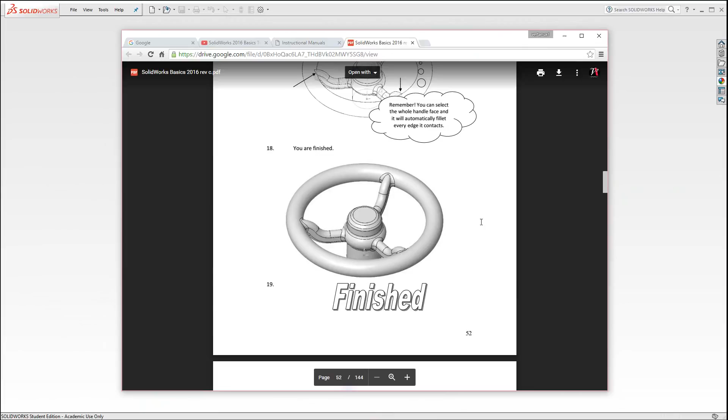This is our goal today, to create this hand wheel that you see. We're going to step through how to create that. Some of the things we're going to learn are some new sketching techniques, as well as sweeps and circular patterns.

Start with a new part file. Make sure you're in IPS for inch pound second, just down below here. Just make sure that's set to that. Let's go to the front plane and start a sketch.

The first thing we want to construct is actually this block, which is 3 inches by 1 inch. So we could take the corner rectangle tool, glide up to the origin when it snaps orange, click, drag it out, click again, and go ahead and add smart dimensions. 3 inches on this side, and on the base, set it to 1 inch.

Go to the centerline tool and just draw a vertical center line above that.

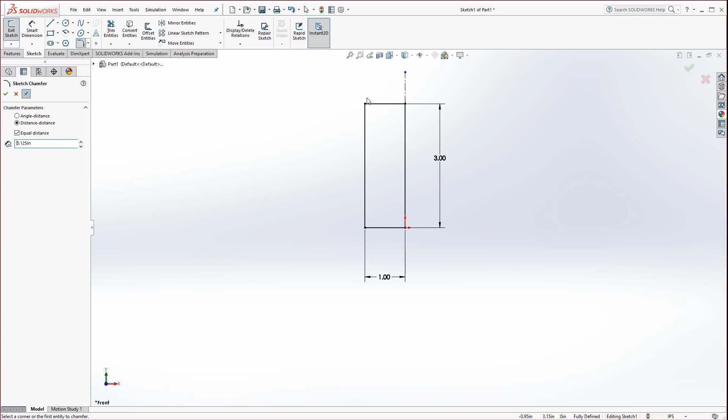Now, what we're going to take a look at next is the sketch chamfer tool. If you click on sketch chamfer, in this case, we'll keep it at distance to distance and set it to 0.125. Just click on this upper left corner, and you'll see, I'm going to hit the green check mark, and you'll see these dimensions up here.

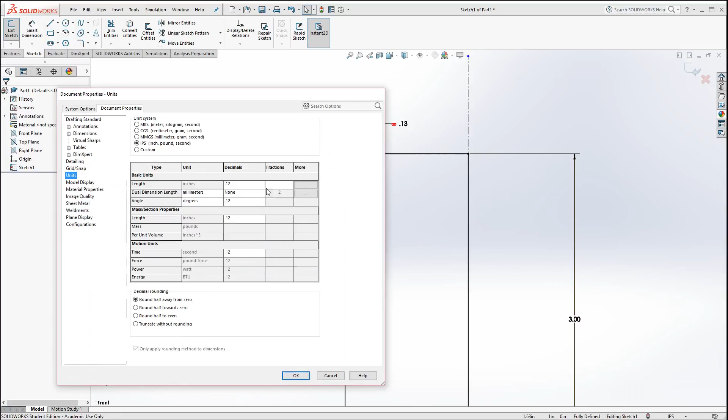Now you'll see a little red chain link, and that means the two are linked. If you change one, the other one updates. Notice it's 0.13 because it rounded it. So if you go to IPS, edit document units, you can set the length in units here to 0.123 to heighten the precision.

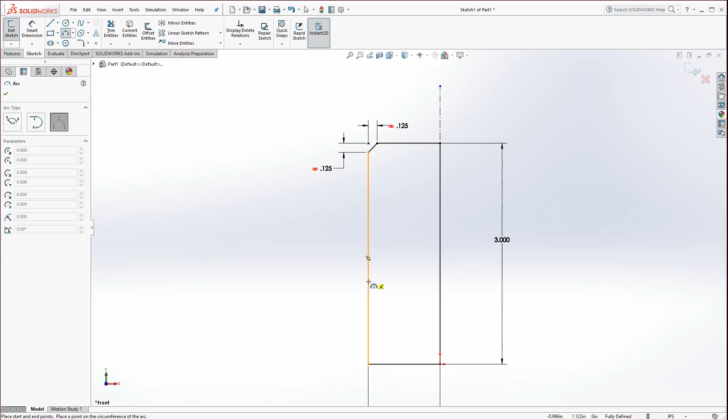The next thing we need to do is add a radius onto here. So we're going to click on the little arrow to the right of the radius options and go with 3-point arc. Move your pointer up to the edge on the left side of your rectangle and get below the midpoint, about approximately where my pointer is currently. Click one time and release it.

Move your pointer up again past the midpoint, so maybe around 1 inch for the length. Click, and then move your pointer outward. Now be very careful, keep the center point. If you look there, there's a little blue center point right underneath the radius 0.623. Keep that to the right of the line. You don't want to hyper expand this, or else it doesn't collapse back in, so keep it below that. Maybe make the radius around 0.6-ish.

Click, and now let's go to Smart Dimension and add a dimension to that. And the dimension for that is 1/2 inch.

Now we need to also add some dimensions to locate the center of it. In this case, it's going to be 1.75 off the base, and the center point is actually positioned 0.25. Well, in this case, actually, we have a 2.5 diameter.

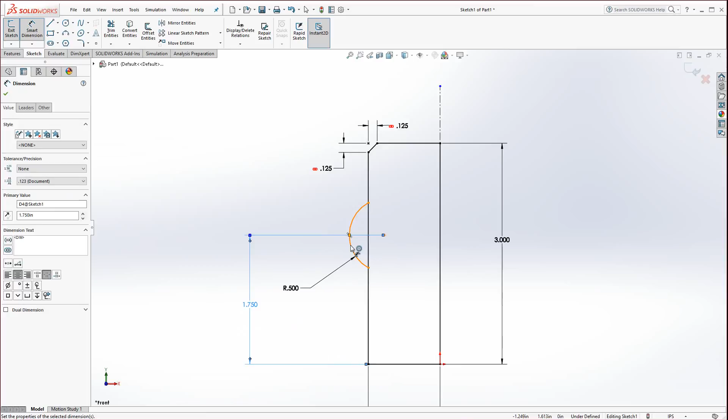So let's first position it off the base. Click on the arc, click on the bottom line, drag this out 1.75, and now go ahead and click on the arc, and then click on the center line that's peeking out.

If you don't click on the center line, and if you click on the object line below it, you won't get this next option. Click, drag it to the right, and you'll see it will give you the diameter dimension, which we saw in exercise 2. Go ahead and click on that and just hit the green check mark, because what it's doing, notice it's dimensioning to the center. So whatever the dimension is, it's not what we want.

So instead, go to leaders, and you'll see arc condition, first arc condition, and we want maximum. And it takes it all the way around if we were to look at the maximum extent of that arc on both sides. Now there's another way.

Usually you could click on these points and drag them out. That sometimes works, but this way is the best way I found. If you don't get the arc condition or first arc condition options here on the leaders tab, you probably dimensioned to the center point of the arc versus the actual arc itself. Just delete the dimension if that occurs. Retry dimensioning from the arc to the center line.

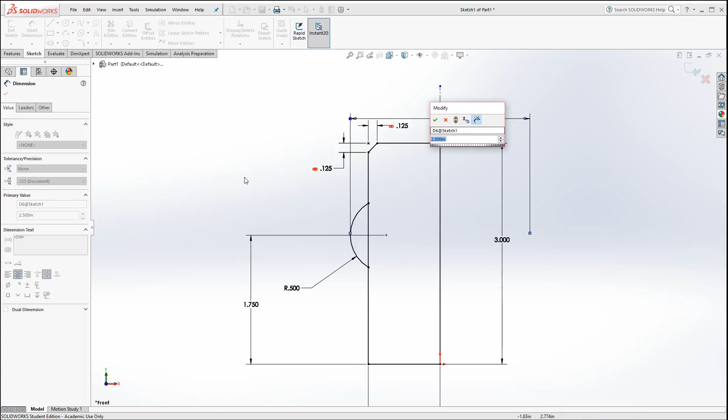Okay, now I could actually just double click on the dimension and type in 2.5. Also, if you want, you can double click a couple times on it, then hit the green check while this is still active. You'll see there's some dimension options, including a small library like the diameter symbol, which puts a diameter symbol in for us. That's helpful, not essential, but it's helpful for making the drawing later on. We don't have to put it in later.

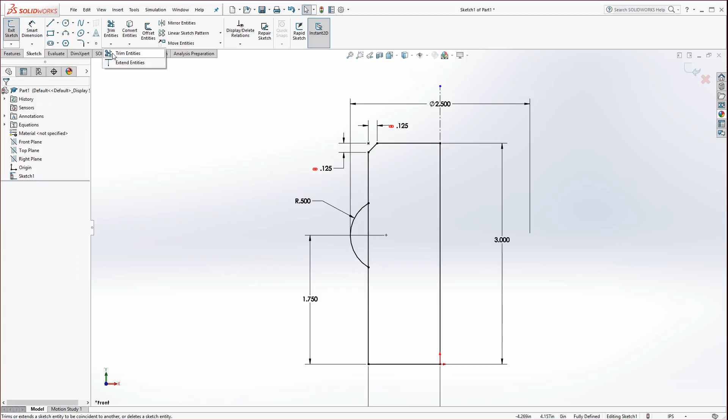Okay, let's reposition these. Now we just need to trim this out, so make sure you go to Trim Entities. Click on it. Notice if you hit the little arrow, there's trim and extend - believe it or not, Trim Entities does both. In this case we're going to use Trim to Closest. Just get your pointer on that line in between the arc, click, and it will remove it. Hit the green check mark.

Now you're free to revolve this. Let's go to Features, Revolve Boss Base, and it should pick up on the center line without us having to select it - as long as there's one center line, it just grabs it automatically. Let it go 360 degrees around.

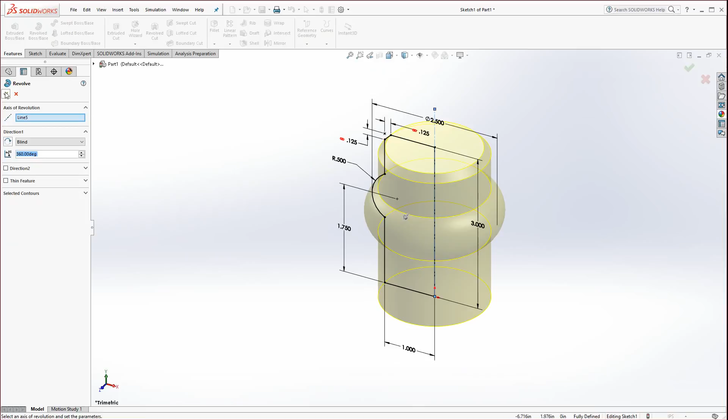Okay, now we could go ahead and select the front plane again and start a sketch, because what we're going to do next - hit your space bar, go to front, and zoom out with your scroll a little bit. If you want, you could also hold Control and your middle mouse button to pan to the right. We're going to construct one of the spokes.

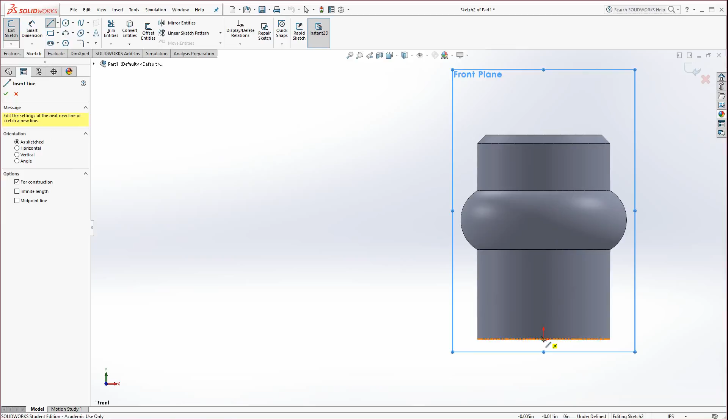So we're going to make, you might say, the skeleton of the spoke using curves. We'll go to the line and align yourself - actually, go to center line first, and click on that origin at the base because it's the center of the model. Make sure you draw a vertical center line. Hit Escape. Now take the line tool and find somewhere on this edge, but not the midpoint necessarily.

Click and drag out a 2-inch line and then hit Escape. Go ahead and smart dimension that line, just drop it up here at 2 inches. Then go ahead and select the line and dimension it to the bottom edge of the hub, and dimension that at 1.75. That should center it for us on that radial area.

Okay, now let's go to the arc tools - in this case, find Tangent Arc. Click on this point, drag it to the left and up. It should be less than 90 degrees, so 70 or 80 degrees is good, and the radius of about a half inch is fine.

Click, and now you'll see you could drag off an additional tangent arc, and if you can, infer to it and actually get this center directly above - or below, I should say - the end of the arc. That's great. If not, don't worry about it. Click and then hit Escape.

Now go to the line tool and draw a line from this end, just extend it out. Now what we need is a tangent relationship between here, so as you look - I'm going to hold Control and select all these just to show you - you need to see tangency, tangency, tangency. That's what those little symbols indicate.

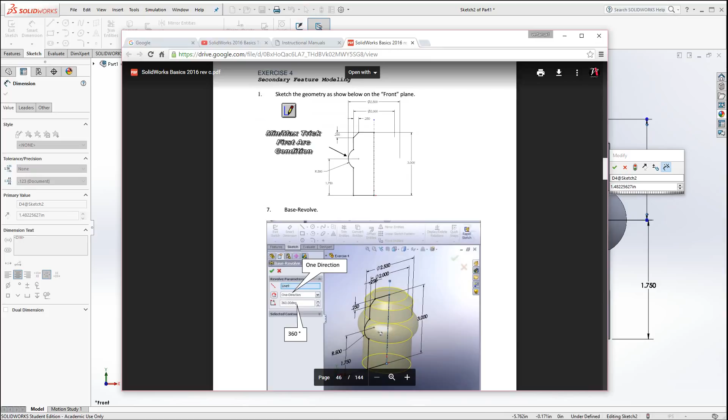Okay, now we could go ahead and add a few more dimensions here. Let's dimension from this line to this line. Drag this to the right, and that is going to be, let's take a look at the print, 1 inch. Okay, and finally, select this point to this line, just get it up here, and that's going to be 5 inches.

And now hit the rebuild button. The rebuild button regenerates the model. Any changes that might have occurred will update, and also it exits you out of the sketch. So you've got to be careful in some cases. You don't always want to rebuild while you're in a sketch if you're editing it. But if you do hit rebuild, notice it turns gray.

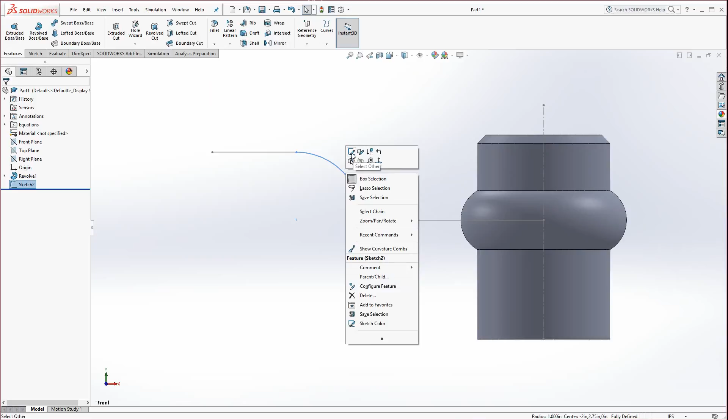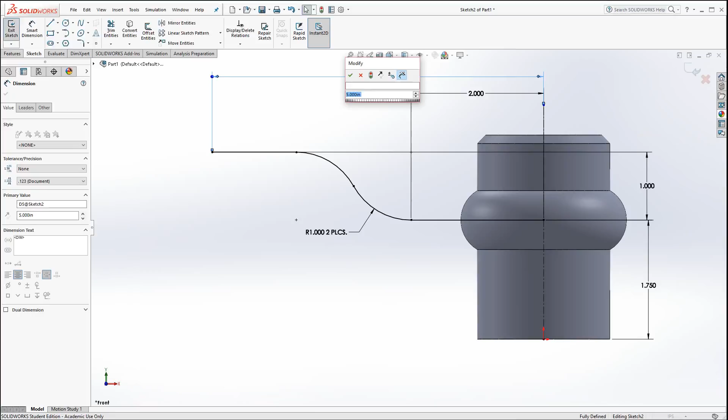You could always double click on it to bring it back, or you could right click on it and you'll find edit sketch. Different ways of getting back in, but I'm just going to double click on it because I think I actually put in the wrong dimension here. So let me go back to the drawing. I did. It was supposed to be 4 inches. So I'm going to double click on the dimension, type in 4, and hit enter. And now I could hit rebuild again.

All right. Now we're going to build the profile at the end here. We want to create a plane. There's several ways you could do this, but this is just one way. The trick is you select the endpoint where the plane is going to rest. Now hold Control down and click on the line that's attached to that endpoint. Click. And I'm holding Control. So you have to select the endpoint and the line it's attached to.

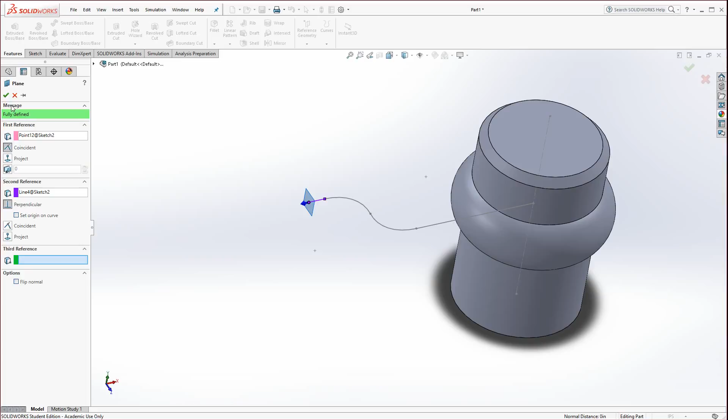When you go to Reference Geometry and Plane, you will see it will automatically create a plane perpendicular to that point, and that line, I should say. So that's one of many ways to create a plane. Go ahead and hit the green check mark. These are not really boundaries, it's just a visual aid, so you can enlarge that if you want, or make it smaller. Okay, now go ahead and select that edge of that plane and click on Sketch.

And hit your space bar, and here's where you could go normal to. All right, if it's rotated incorrectly, remember the Alt keys. You could rotate with Alt and the arrow keys; left or right will go clockwise or counterclockwise. Just make sure it's vertical as you see here. Now I'm going to take the center point arc tool. This is the toughest of the 3 arc tools that you have there.

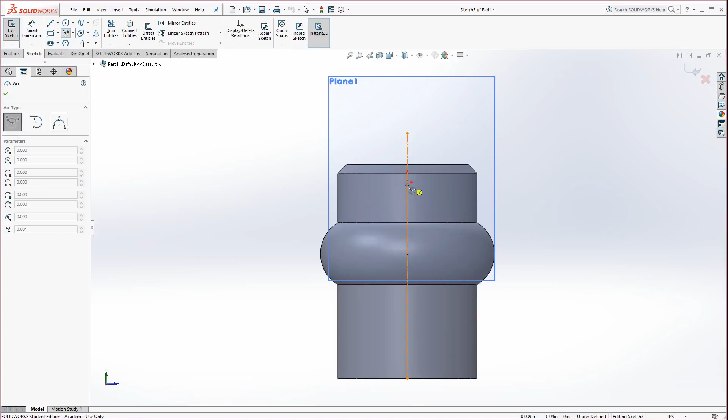Move your pointer right here, get on the origin, click, and drag out a radius about 1/2 inch. So not quite 1/2 inch actually. Keep it below 1/2 inch. And notice I'm horizontal. Click, drag up, and if you get an opening instead of an arc, a small little arc, go back down around and then go back up again. I'm just moving, I'm not clicking on anything. Now rotate it around till it snaps horizontal to the other side.

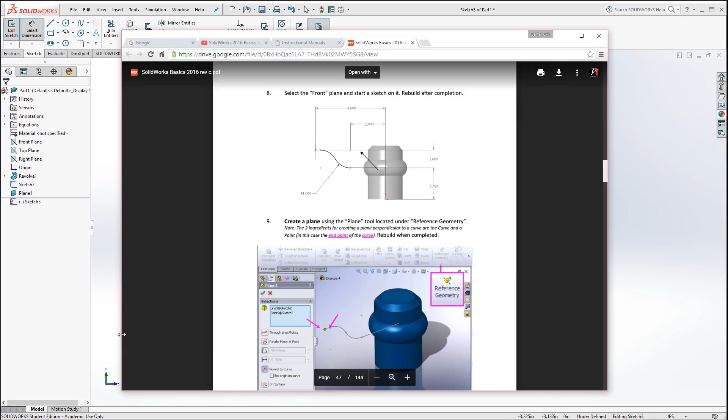Click, and now take the line tool, and off of this point drag down a short little line about 1/2 inch. Click, drag it across until it infers. Click, and connect it to close the line. Now let's go to Smart Dimension, and let's put the dimensions in according to the drawing. So in this case, 0.75, 0.5. So this, click down here and drop it below 0.5.

Now here's what you see occurring. Even though I drew that, it did not capture tangency automatically, and that happens sometimes. Sometimes you get lucky depending upon how you're drawing and what you're drawing. In this case, it was not successful. So I'm going to leave the dimension there. Don't panic about it. Just hit Escape on your keyboard if this happens to you.

Now hold Control and select the line and the arc that you want to make tangent. Release Control, and you could go ahead and click on Tangent. And now notice how it snaps back. Okay, the next dimension is 0.75 from top to bottom.

Click on the bottom line and click on the actual arc, not the center point of the arc. If you do that, you will limit yourself to this dimension right here. Just don't put it in dimension just yet. Just hit the green check mark. And what we can do now is you could grab that little blue square and drag it up.

Now in this case it's snapped, and this is what I mean by sometimes it's a little quirky. This is where you use the leaders tool and go to max. Yours might work. Sometimes I've seen where it works, other times it doesn't, depending upon what's behind it most likely. And in this case, now this needs to be 0.75. Okay, hit escape.

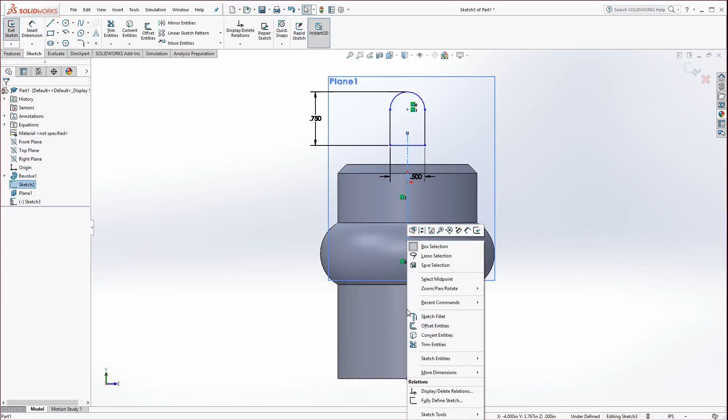And I'm having a tough time, so I'm just going to drag it way up here, release it. It's still selected. Hold Control and select the origin. In this case, I'm having a hard time because of that center line. So I better hide that center line. Right click, and we want to find the hide. Actually, I'll have to hit escape. Let's see if we could do this here. Okay. Click on hide, the little eyeball there.

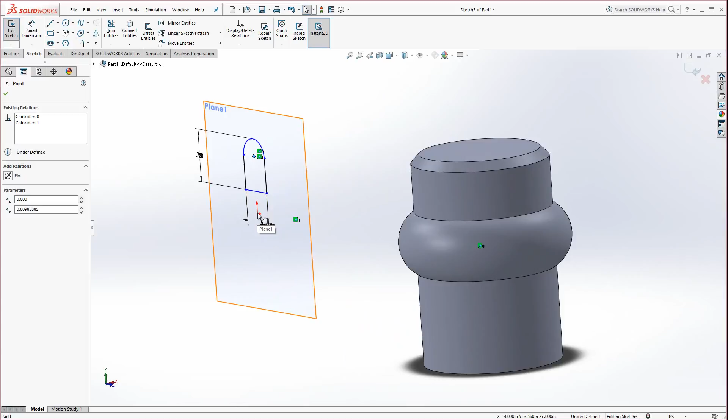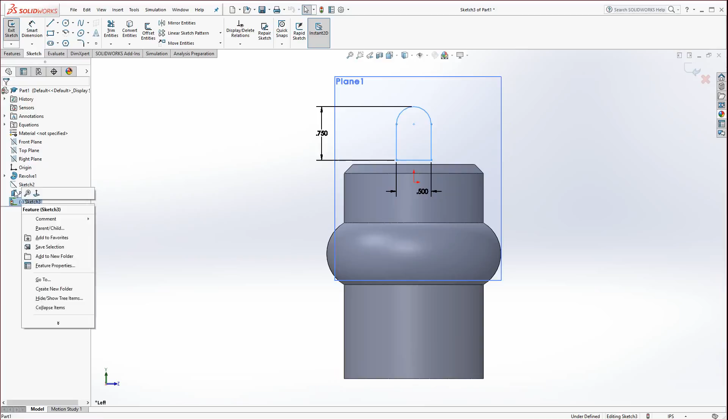All right, now we should be able to drag this down, and maybe not. I'm going to hold Control. Let's see what we got going here. Okay, apparently we're having a little bit of a rough time on that one. Let's go Normal To. Next time I'm just going to hide that sketch behind it so I don't run into this issue. Okay, so actually I'm going to go back and unhide that. So I'm going to show it.

And let's see if we could get it at an angle here. So I'm going to select that, and I'm going to hold Control and select this. Go with coincident, and now it locks in. Go ahead and hit the green check mark. So I think part of the issue is if the center line might be there, but just go to like an isometric view and you could lock those points in to that sketch.

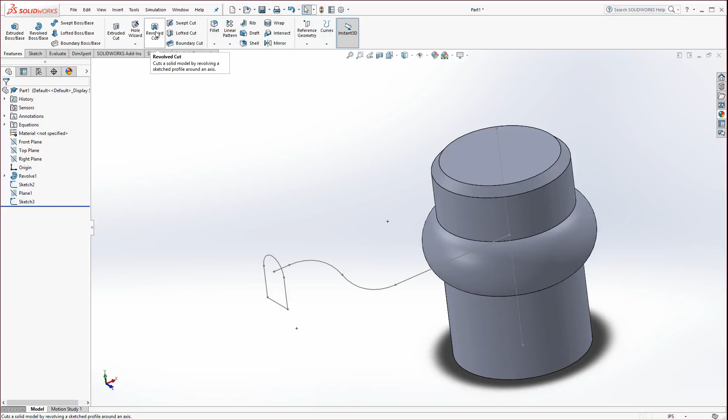All right, now that we have that completed, hit the rebuild button, and let's hide this plane. Just get on the edge of the plane, right click, and click on the little eyeball. Now we're ready to sweep this. Let's go to this swept boss. Click on it. Select what looks like a tombstone, and then select any curve on this spoke. And you can right click or hit the green check mark up here. And now we could actually hide that sketch. If you right click, go to the eyeball to hide it.

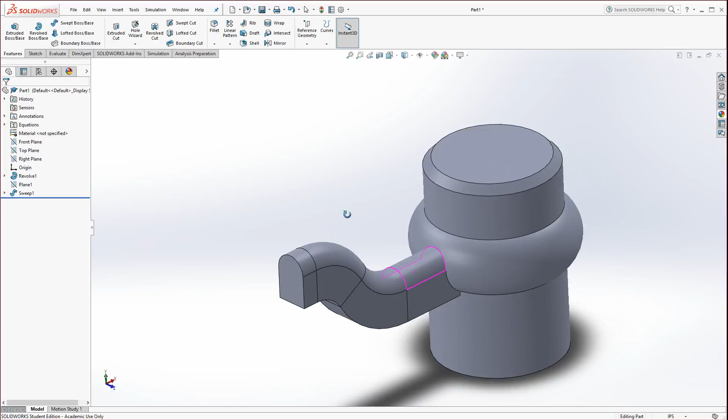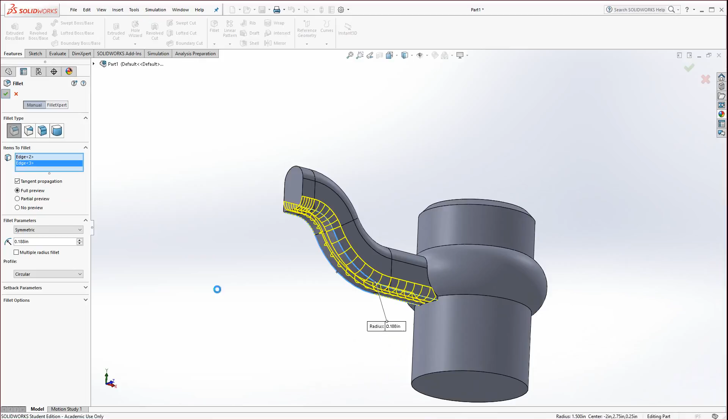Okay, let's put some fillets on there. Go to the fillet tool, set it to 0.25, and select this edge here. Actually deselect it. Click on it again. We actually want 0.188 fillets, and that's going to be on this underside edge here and this edge here. Could we have added them into the sketch as sketch fillets? Absolutely. That would have been actually more efficient. This is okay though. Just hit the green check mark. Go to the fillet tool, and now set it to 0.25. And now we could go ahead and select that edge and fillet it around.

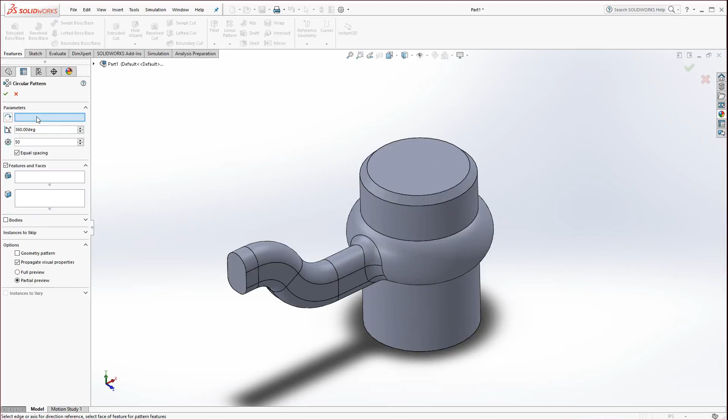Okay, the next thing we're going to do is we're going to pattern that. So underneath the linear pattern tool, there's a little arrow, go to circular pattern. First of all, click up here for the pattern axis. We'll start at the top and work our way down. Click on this cylinder or any of the cylinders except this one. The radial cylinders where there's fillets and things, it doesn't usually like that. Now over here we just need 3 spokes total. That includes the one that's there. Now go ahead and click on the features here, and let's select the spoke.

Now it looks like you got a good preview going here, but be aware it's missing a couple things. It's missing the fillets, so make sure that you select the fillets as well. You can do this also up here. Sometimes the fillets might be small or features are very small and difficult to select. Hit the little arrow there and it will drop down, and you could select the fillets from the feature tree or any other features you might want to carry along. Hit the green check mark to apply.

Now let's go to the front plane again to finish this up. Select sketch, hit your space bar, and you could go normal to. And now let's go to the circle tool. And if you left your other plane up, the plane 1 that we created earlier, you won't be able to capture this midpoint, and you have to use the dimensions that are in the book. But if you capture this midpoint, you do not need to use the dimensions in the book.

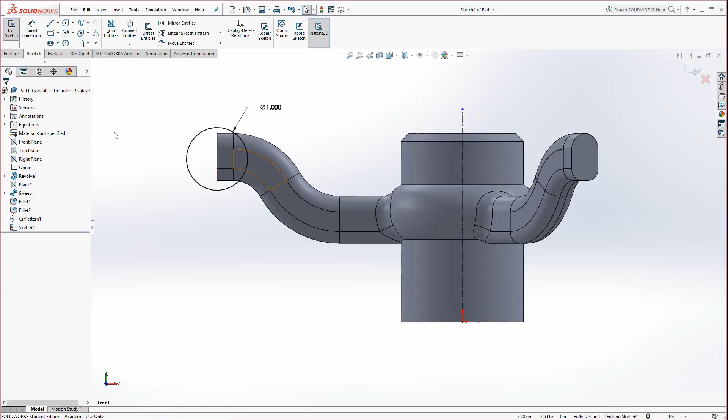Click and drag this out, draw a circle, and dimension it at 1 inch for the hand wheel. It should turn fully defined because it's centered on that edge. Now, what you're going to need is a center line. You can reuse the center lines from the other sketches by showing them, or you could turn on axes, but it's just easy to draw a new center line. Go to Features, Revolve Boss Base, and there we have it.

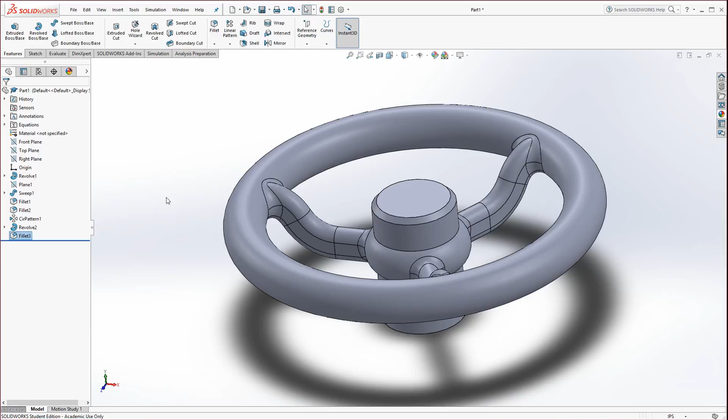Now go back to the Fillet tool. Should still be set to 0.25. Select this face. Other CAD systems make you select all these edges. You just have to select the face and everything gets filleted. Hit the green check mark. Okay, rotate this around. We're going to take a look.

This isn't the best application to show this in, but the Hole Wizard, which I haven't showed anyone until this exercise here, exercise 4, is a wonderful tool. If you click on Hole Wizard, you get to pick the type. There's counterbores, countersinks, standard tapered holes for national pipe threads. You can even make custom holes. You see them all there.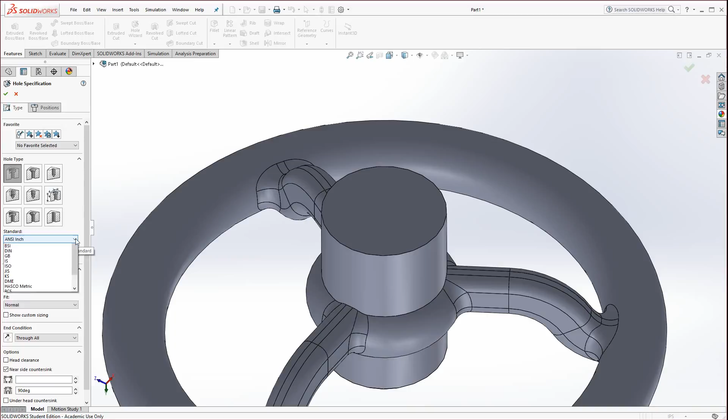Let's go with the counterbore, and under ANSI inch here, we'll stick with that, but notice there's all the different formats. And then binding head screw, there's all types of different hex screws, hex finish bolts. Be aware, whatever you select here, what's nice later on in assemblies, you could propagate those particular binding head screws and things will automatically be identified using Toolbox, if you have Toolbox, which has all these standard nuts, bolts, washers, things like that.

Okay, the hole specification. Let's go with a number. We'll actually go with a 1/4 inch. And you'll notice the fit, you could specify close, normal, or loose. Also, you could go through all; in this case we want to go blind, and then specify 1 inch in depth. Okay, and then these are some additional settings if you want to change those.

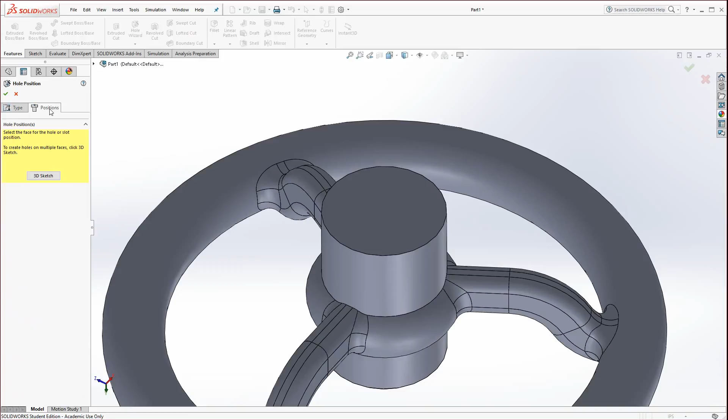Now you click on the Positions tab, and you could go ahead and select this face. And you'll notice you could actually capture the center. You could click, drop one in. You could also add additional ones just by clicking wherever you want additional holes. I'm going to right click to go to select. And then you could click on those and delete them, or you can move them.

Those points can be deleted. They could be positioned too using dimensions. You could go to the Smart Dimension tool and locate them. We just want the one that's right here. So go ahead and hit the green check, and now you have your Hole Wizard mastered. Okay, just make sure you save that as capital E4 for exercise 4. That concludes the actual exercise.

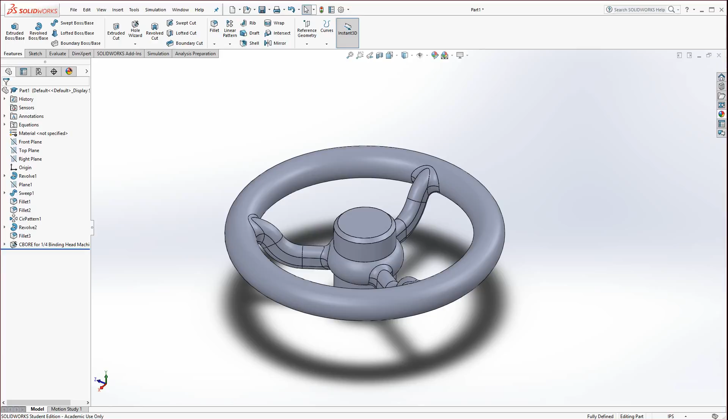Now there's some labs that go along with it. Feel free to pause the video and maybe watch the labs after you give them a try on your own. Otherwise, you could go ahead and watch the videos if you wish. Okay, in the manual, we have Lab 4. Lab 4 is a very difficult part. It's a great challenge. And so what I'm going to do is step through how to create this. Let's take a look at some of the basic dimensions.

Always look at the outside. Ignore the inside at first. Look at what the big picture is. We have a 1/2 inch thick part. It's thin walled. You can see that it's shelled out. Typical wall 0.06. It has a radius of 0.75 at the bottom, a radius of 1.5 at the top, and a couple angles here. There's one that darts out 24 degrees from end to end, and one that's 115 degrees from end to end. So let's give that a try here.

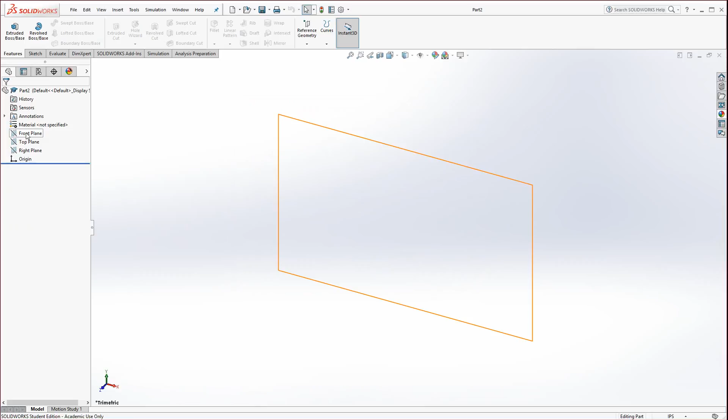Very similar in nature to exercise 3 and also lab 3. Hit OK. It's a little bit more detailed though, so I'm gonna select the top plane to sketch this. Take your centerline tool. Anytime you see a symmetric part like that, draw a nice center line, because you're going to be able to use that for mirroring. Then go to the line tool, and down below here, click an angled line out about 1.5 inches, and then a short little line, maybe about 1 inch.

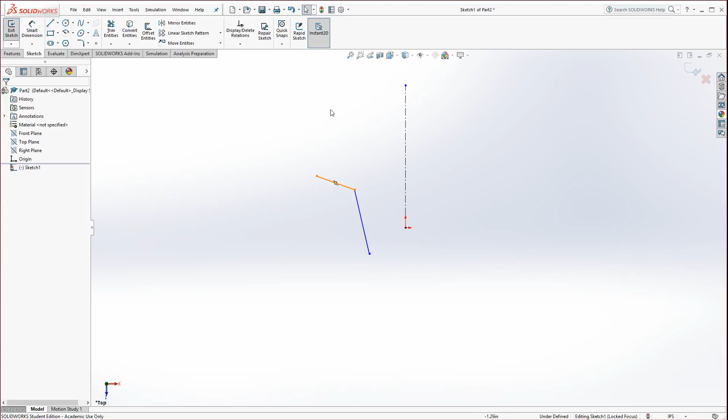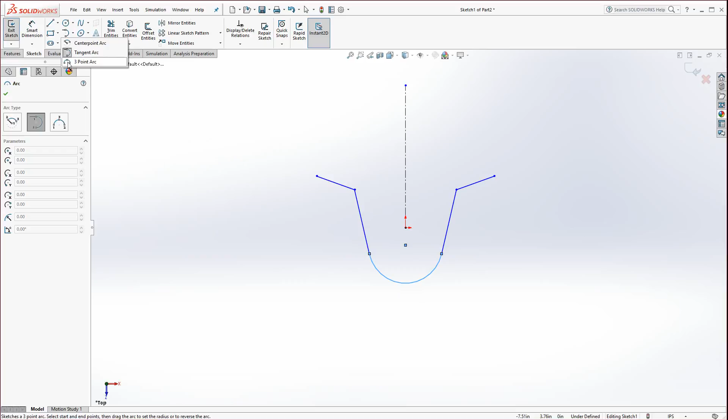Hit escape. Now click and drag a fence to surround the two. Go to the mirror entities, and it should mirror it over to the other side immediately. The bottom arc is a tangent arc. You could tell because it's smooth in the dimensions that are given. The top arc is not tangent, so you're going to want to use 3-point or center point arc. I'll use 3-point because I could just click and go across, click, and drag it out. Hit escape a couple times.

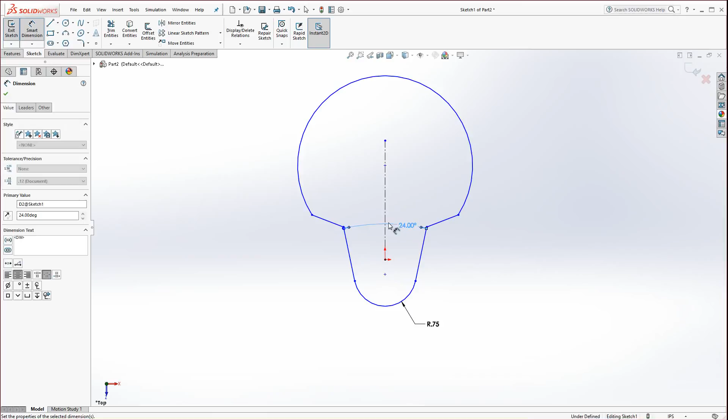Let's add the dimensions. So the smart dimension at the bottom was 0.75. The angle between these two lines was 24 degrees, and the angle between these two is 115. And then this arc is 1.5. Now we need to position it. So the dimension between the two arcs is 1.25. And now it's starting to look closer to what it should. Hit escape, and let's drag this to the origin.

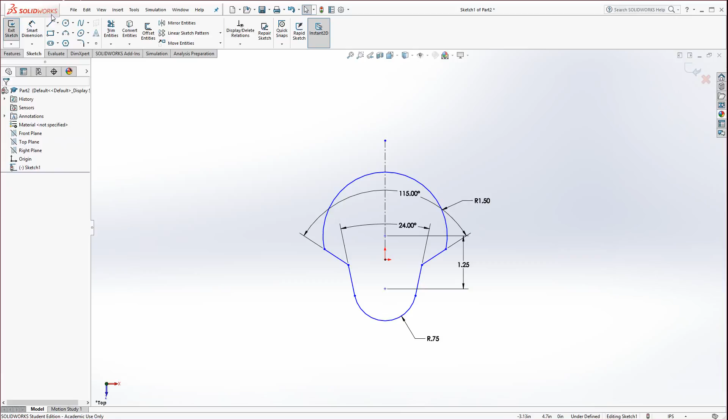In this case, actually, there's one more dimension we're missing. It's not dragging. It's this 1-inch dimension from the corner to the center of the base arc. So click on the bottom arc and this little corner, and that needs to be 1 inch. Now we could drag this, snap it to that center.

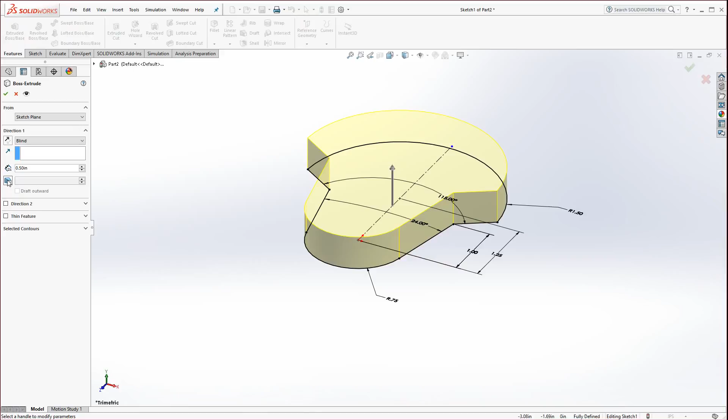Go ahead and extrude this, and it gets extruded 0.5, but there is draft, so don't forget the draft. And according to this print, our typical draft here is 25 degrees. So click on draft, 25, hit enter, and the green check. Okay, you have the base completed. Now put the fillets and chamfers on. Then you could shell it.

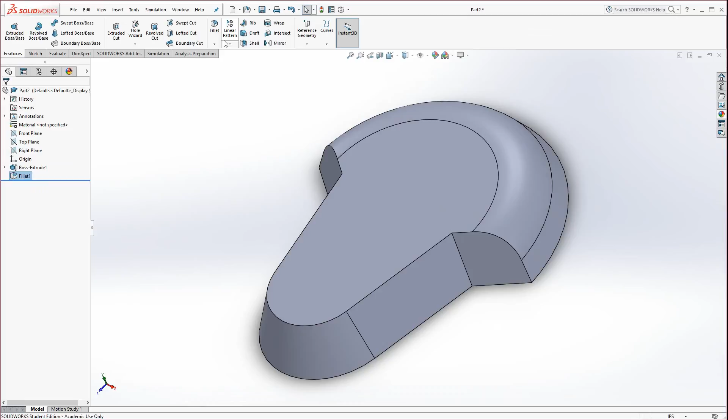So in this case, we have a chamfer of 30 degrees by 0.181, and then a radius of a half inch. So let's put the radius on. Radiuses are always easy. So 0.5, select this edge, and hit apply. Now go to the chamfer, and it's 0.181, and then it's 30 degrees. And select this edge and hit the green check.

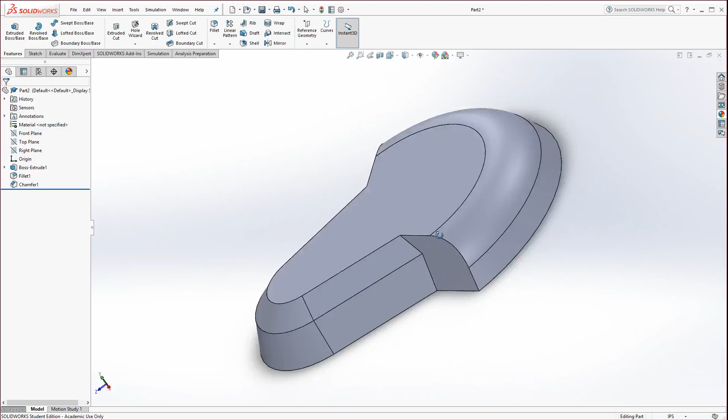There. Now we could shell this. Flip it around the back, and the shell is 0.06 typical. So select this back face and hit the green check. Rotate it around now, and let's get the details on here. Select this face, start a sketch, and go normal to. And we'll draw in one of those, looks like a petal for a flower.

Take the centerline tool again, and at the origin, we could use this. Oops, I didn't lock in before I selected that. Make sure you get the orange dot before you do that. Draw that in. I accidentally drew an object line, so I'm going to click on it and select construction geometry. Now I could go back to the line tool, draw a little angled line just like that, and then if we click and drag from right to left, it'll select both entities even though the center line was not completely in the envelope, and hit mirror entities.

Now go to tangent arc and cap off the bottom and the top. And now let's take a look at those dimensions there. Hit escape a couple times. For that, the bottom radius looks like it's 0.1 and the top is 0.2 and the distance between is 0.5. So bottom 0.1, the top 0.2, and from centers 0.5.

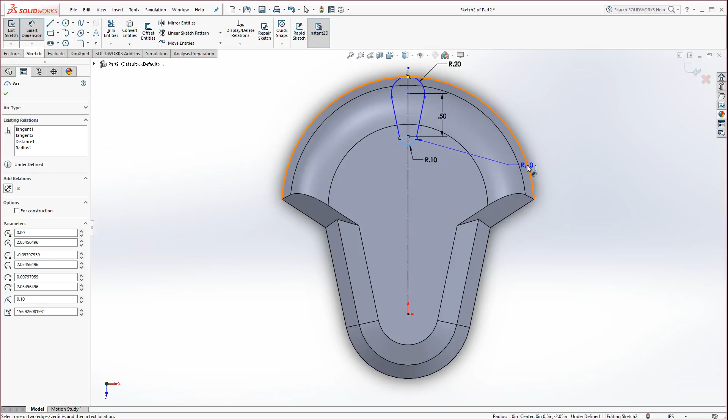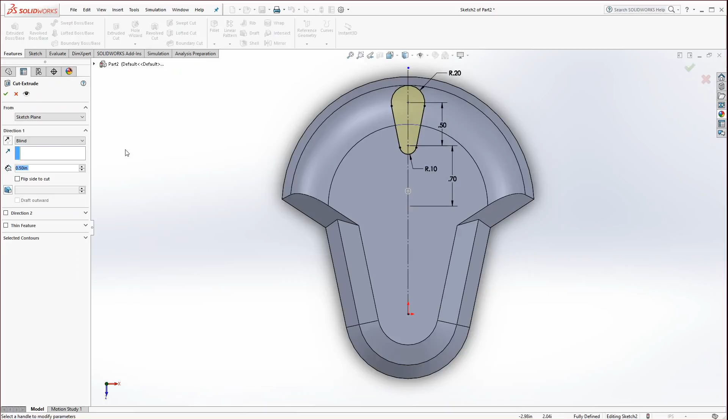Now we have to locate this. Go ahead and select the bottom arc and select this top arc and it will dimension to the center. Click to drop that. And this I think is 0.7. If we take a look at the print just to verify that. And it's a bolt radius there, 0.7. That's correct. Okay, let's go to Features and Extrude Cut through all. All right, now that we have that, we want to pattern it. So go to Circular Pattern.

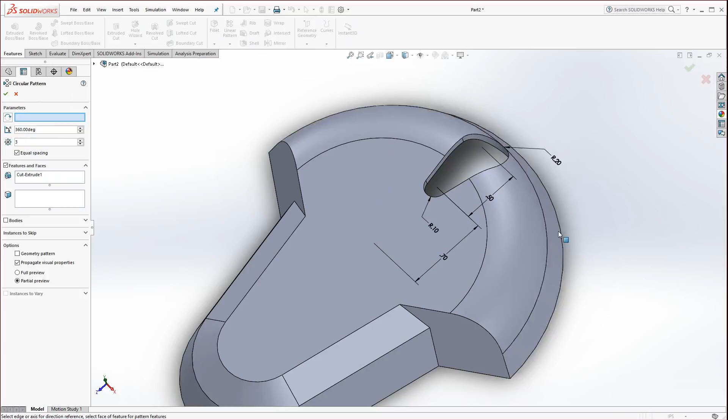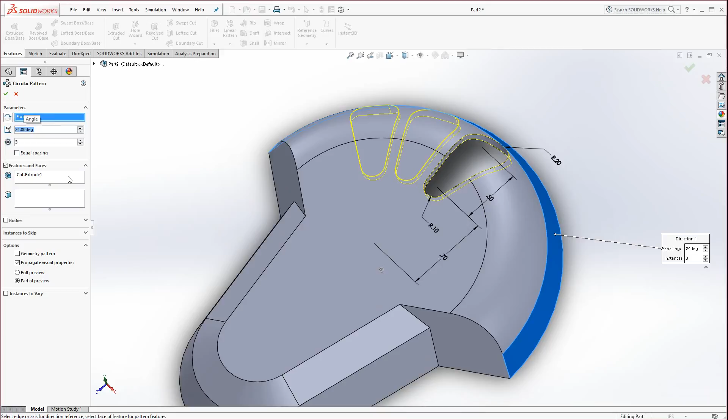The feature to pattern, go ahead and select this face here. And then click over here and select this outer edge. And we can see it's appearing like that. Now, because we don't want to go all the way around here, we're going to do 3, and they're 24 degrees apart. So if we specify 24, turn off equal spacing with 3 instances, there we go, we have 3. So that's a circular pattern just for a little segment.

Now let's use the mirror tool. Click on mirror. The mirror plane, if you hit this little arrow, technically if you drew this correctly, your right plane should be dead center. You'll see that it picked up on the feature to mirror because those were the last selected entities. If they don't show up in a preview, make sure you select the Cut Extrude one, or I should say Circular Pattern one. So it's in there, and hit the green check.

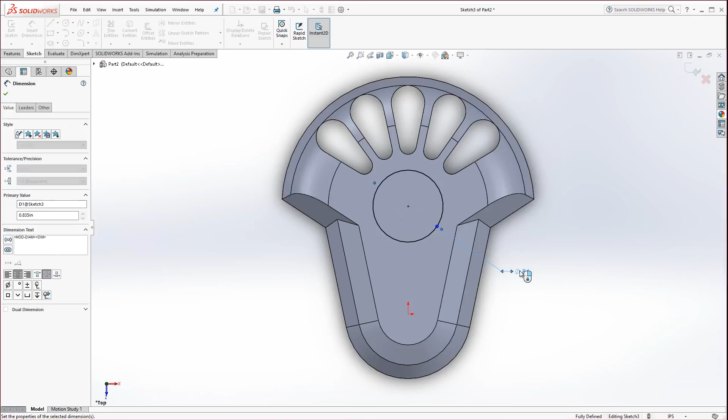Let's select this face now and start a sketch. Go Normal To. Locate the center by moving to the edge, and there's a center point. Click, drag out a circle. This needs to be set at 0.835. Let's go to Smart Dimension. And that gets extruded 0.03 in height. So let me just verify that. And here, yeah, 0.03, and there's a 0.03 radius on it. So hit Apply and go to Fillet. Actually, I'm not going to fillet it just yet. We need to put a little cutout in there.

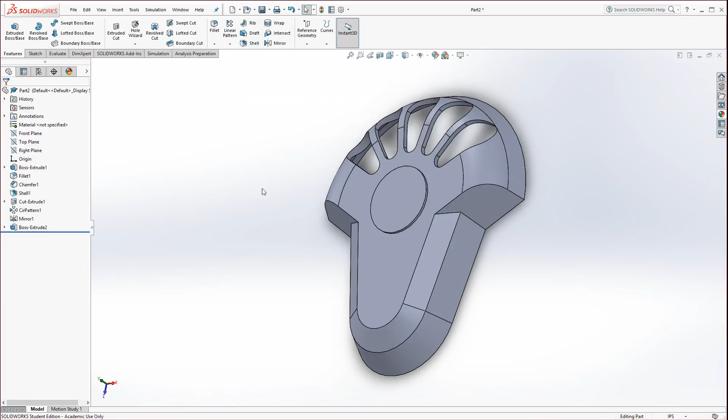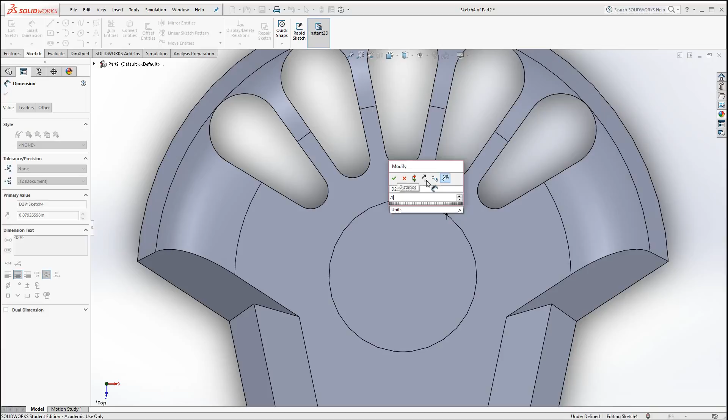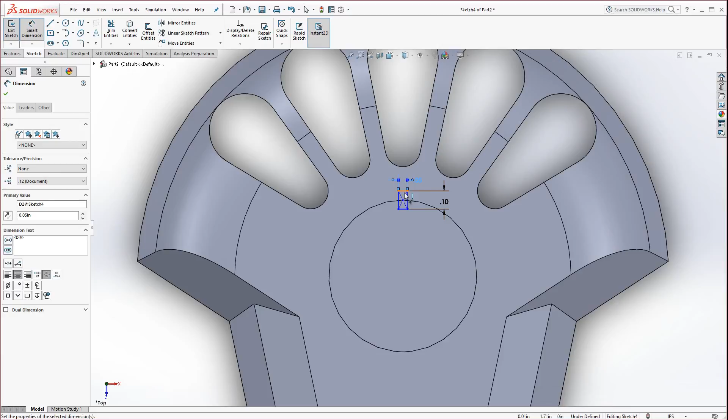Now that gets cut through, and then there's some radiuses of 0.1 radius that go in there, and then it gets patterned. So we need to make sure those are locked in. Control select this and the origin. Make sure they're vertical to one another so it turns fully defined. Now I go to Features, Extruded Cut. Select Through All. And now while that's still selected, actually not yet, we're going to first put our fillet in. Let's go to the fillet here, and we'll set 0.03, select this edge, and then go to Multiple Radius Fillet, select this edge, and set this one to 0.1, and hit the green check.

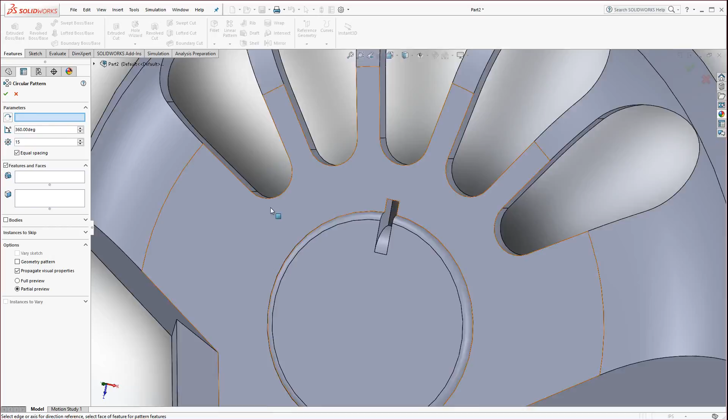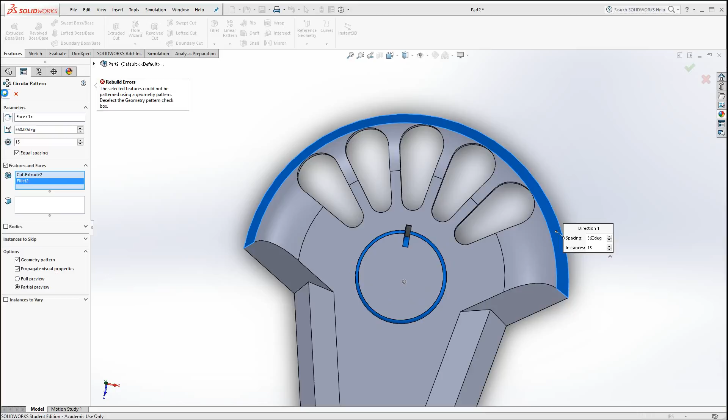Now we should be able to just pattern that. So let's go to the Circular Pattern tool, and we're going to select equal spacing, and I think it's 15, but I'll have to double check that. I'm going to click on this, and we can just select this outer face again, and the features to mirror, select this face, select that fillet, and we see our little preview. And we could double check by counting those. I don't know if I have them called out on the print. And we get a rebuild error, most likely due to the fillet. I combined the two fillets, which I've never done before in this particular instance. So let's try Geometry Pattern. Perhaps that will fix it. Geometry Pattern didn't even fix it.

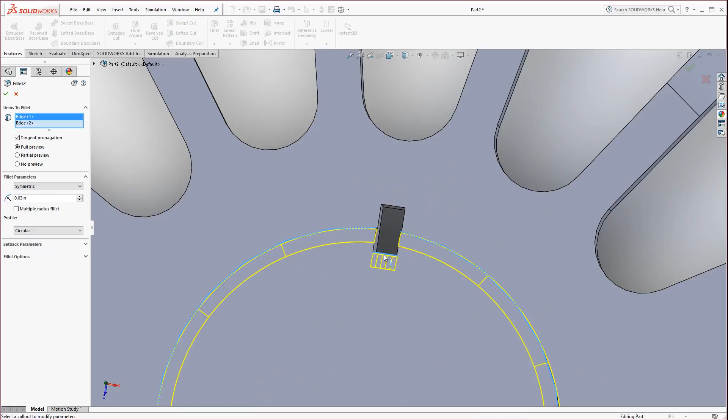So let's cancel out and edit that fillet. Edit Feature. And let's see, turn off Multiple Radius Fillet. And deselect that inner edge here. We'll keep these two separate. So if I click on that inner edge, it's gone. Now we can put in a separate fillet, select the edge, go to fillet, and this one will be 0.1. Thus we remove the two from being into one. We actually make two separate ones.

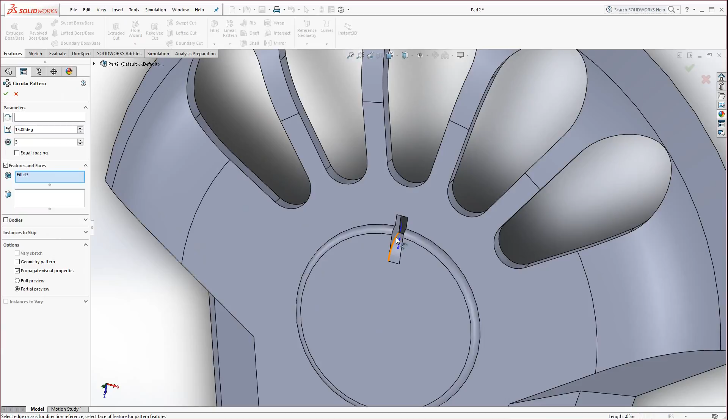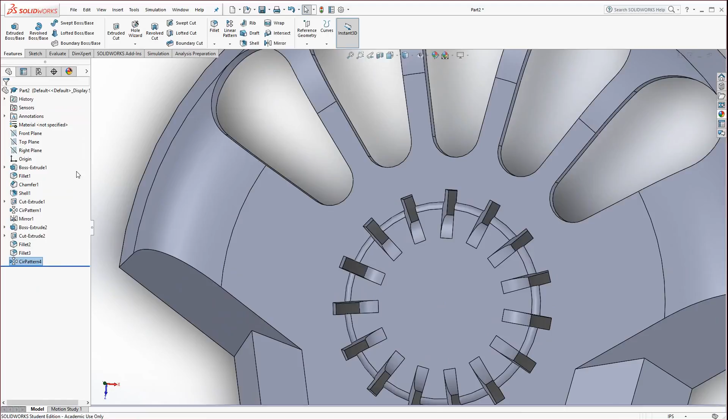All right, now we can go back to circular pattern, and you can see the fillet selected. We'll also click in this little face here, and then we'll select this, and we can select this edge. Make sure equal spacing is on, and bump it up to, I think, 15. Actually, looks good. Hit the green check. And there, separating the two allowed it to work.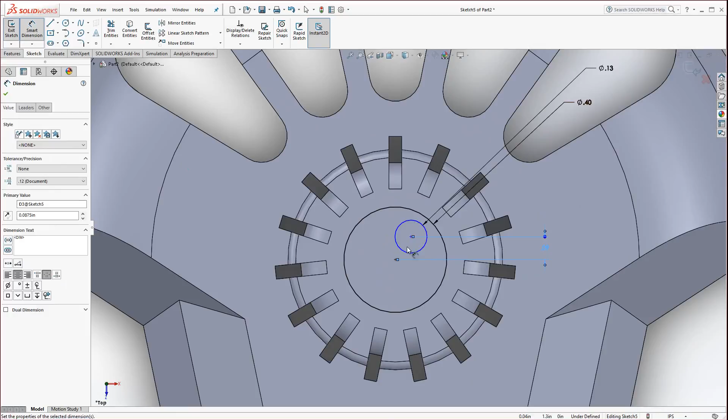Let's go Normal To. And we just want vertical and horizontal. So select from here to here. Drag that out. We'll make that 0.875. Oops, I'm sorry, 0.0875. And then dimension from here to here. Drag it straight up. And that's going to be 0.06. Now we can just go to features, extrude cut, and it's just a very shallow cut, 0.01.

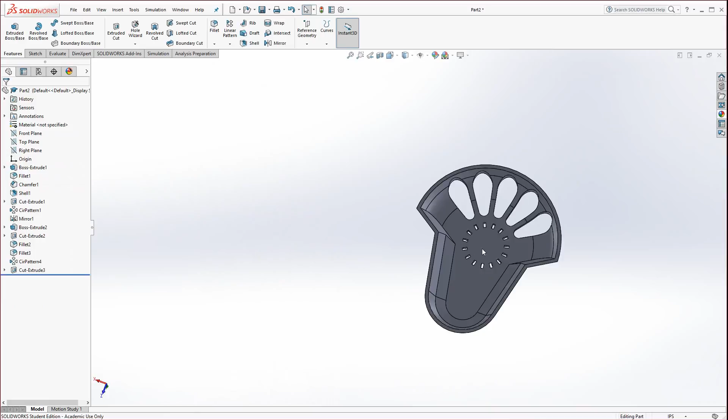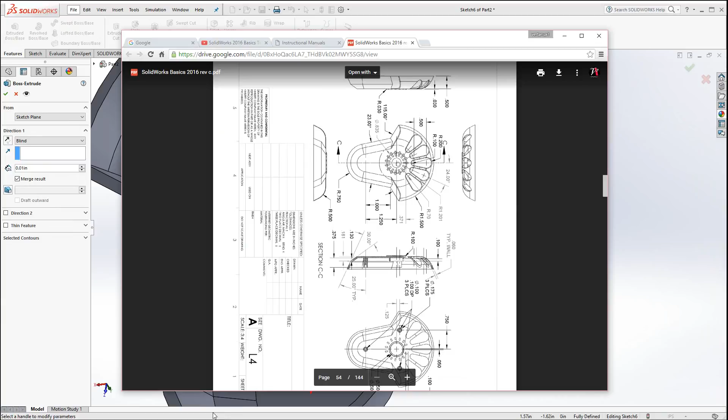All right, rotate it around. Let's get the inside. Select this face, start a sketch, go Normal To, and draw 2 concentric circles in the center. And dimension them. One is 0.6 and one is 0.5. Go ahead and extrude those. And if we look at the print, the extrusion height is 0.13.

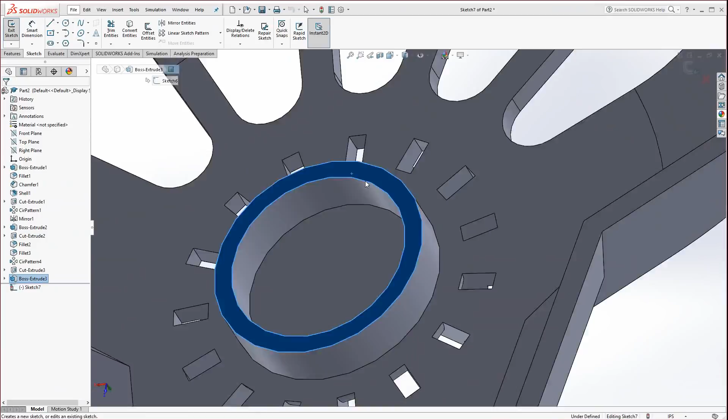Hit the green check. There's a little cutout on there, so select this face and start a sketch. Go normal. Use the center rectangle, drag out a little straight line, and dimension it.

Oops, didn't want that. Stay away from that midpoint. 0.05, and then it's just centered. You could add relations or dimensions, but I'm just going to cut it. Extrude cut, and the depth for that particular one on the cut, you can see on the section view, which is 0.1.

Later that's used as a little keyway. Okay, now select this face and start a sketch, and let's draw the posts. There's 3, so you could draw one here and one here, and then we'll mirror the other one so we don't have as much work to do. Let's just go ahead and draw a center line. Now I could select those 2, go to mirror entities, and now let's hit escape.

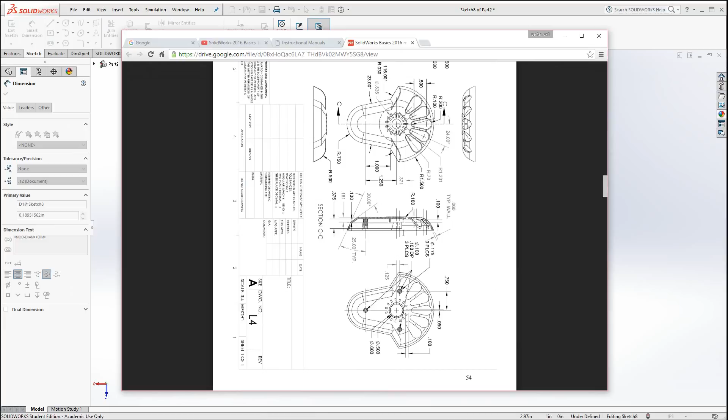Group select these, hold control, select all 3 circles, make them all equal, and now you could add a smart dimension. The diameter for the base is going to be 0.175, and then they get extruded a height of 0.375. So 0.175.

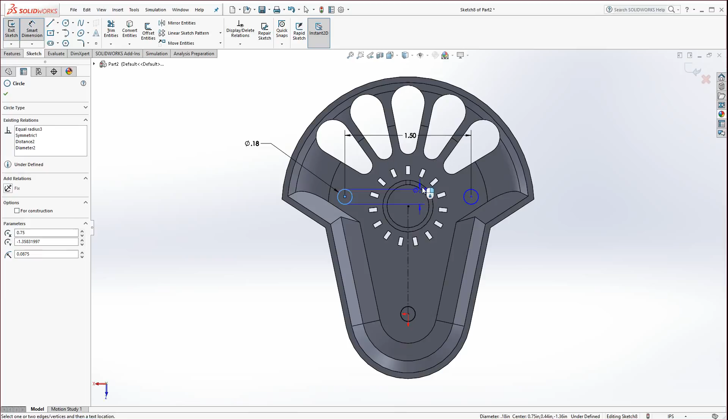Oh, I forgot to add some more dimensions there. 0.175, and then they're spaced from each other, 1.5. And then dimension 1 to this arc, and get right in here. There's a short little distance. Make sure you get this vertical dimension.

And that's 0.1. Okay, now you could go to Features, Extrude Boss Base, and add Draft. The draft on this is called out. Actually, I might not have called out the draft, so let's just put 1 degree.

And the height, I meant to take a look at that again. I forgot what that one was. That's 0.375.

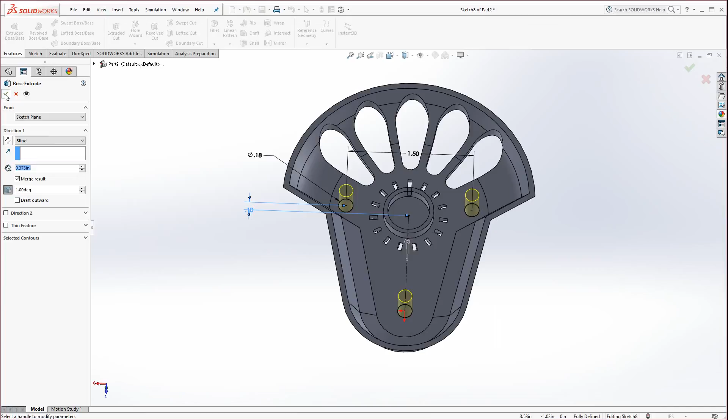Hit the green check. Now select this face here, start a sketch, and on every edge, locate the center, and draw these little circles in here. Hit escape, drag a fence to surround them all, make them all equal, and then their point, hit escape on that one. They're 0.1, and then they get cut. So extrude cut 0.1 deep.

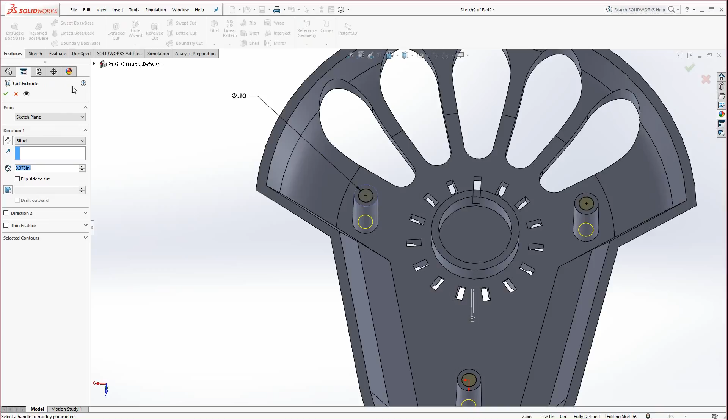Okay, now what's not on the print, that's pretty much it for the print. But what's not on the print are ribs, and so if you wanted to see this, feel free to watch it. You don't have to do these, but let's say you wanted to put in reinforcement ribs on here. So we could, let's see, we'll put some in at the base here, and we'll have them at the base of this. We'll have them start here, start a sketch.

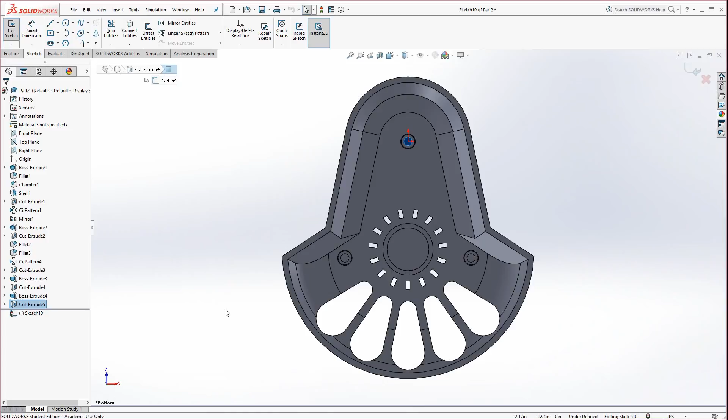You don't want them on the floor, because if you recall, you can't actually... oops, let's go to bottom. And I want that to rotate up, so Alt and the arrow keys. There we go.

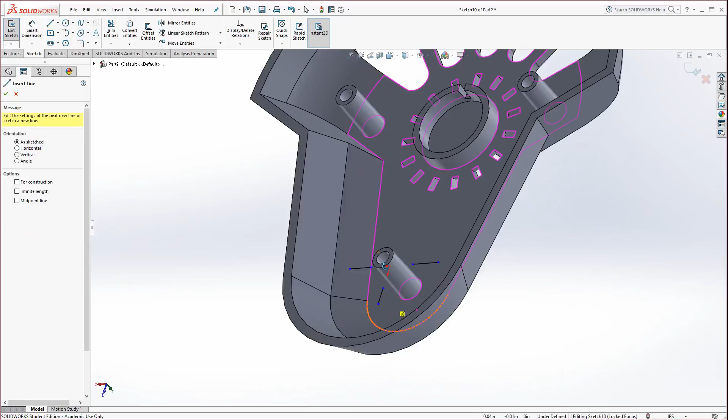So we could actually just draw little segments. I'm just clicking and then double clicking to end the chain. Notice they're just kind of in there. You just don't want them touching the edge. Now we could put a couple up here too.

I'm going to put one over on this side, and then one here. Make that perpendicular to this. I'm not really locking into that, but that's okay. Another trick you could do here is go with the center line and make those two collinear.

That way we know it's centered. This one too, let's go with the center line. Just from the center, drag that out. Make sure these are collinear. I'm just holding Control and selecting them.

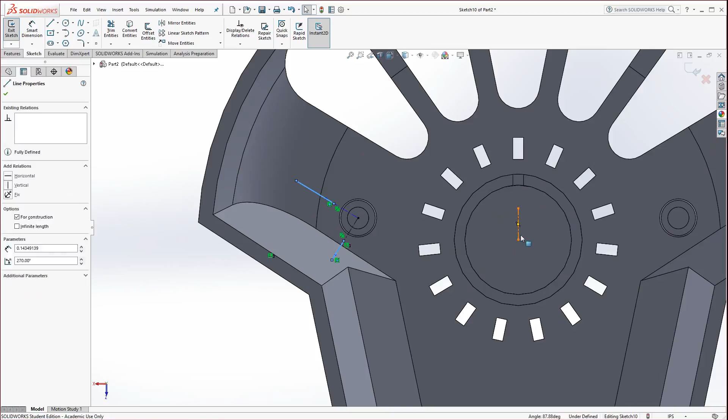Now we want to copy those over to the other side, so the center line is our best option here. Select the two line segments, holding Control, the center line, and then go to Mirror Entities. And they should mirror over to the other side.

Okay, now that we have those small line segments, notice they're not touching the walls. Be careful that you don't want them intersecting the walls. And now we could go to Features, Rib. The rib thickness, since it's a 60 thousandths wall, we'll go with like 40 thousandths.

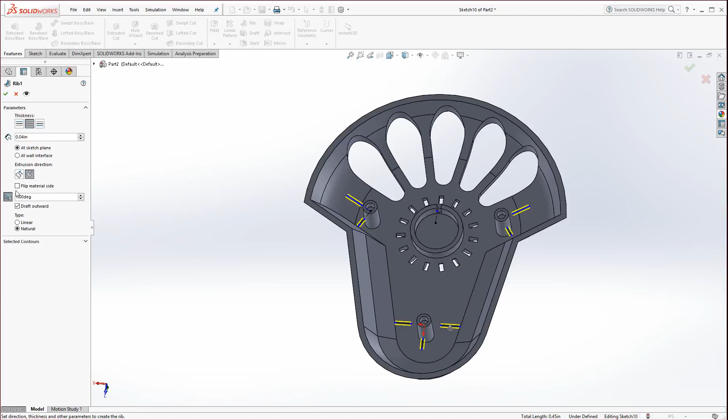And we'll add draft while it's extruding of 1 degree. Hit the green check. And now we have reinforcement ribs.

Okay, just make sure you save that as L for Lab 4. And that concludes exercise 4.